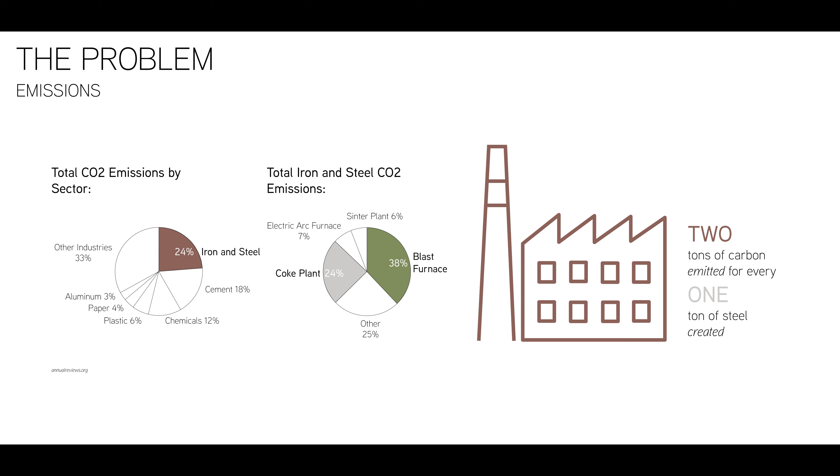One of these major industries is iron and steel. Responsible for 24% of total industry emissions, the production of iron and steel releases more than 3 billion metric tons of carbon dioxide each year, making it the industrial material with the biggest climate impact. This breaks down to about 2 tons of carbon emitted for every 1 ton of steel created. This is largely due to the use of coke plants and blast furnaces in the production process.

We cannot, however, simply stop producing these materials. It is forecasted that by 2050, steel demand will almost double from 1,600 million metric tons to 2,800 million metric tons. This is largely due to how much steel is needed to construct our future infrastructure. Renewable energy, which includes solar, wind, geothermal, and others, is at the center of the transition to a less carbon-intensive society, which also puts steel at the center of the conversation. Steel is required by each of these markets, and without steel, none of the renewable energy sources would be possible.

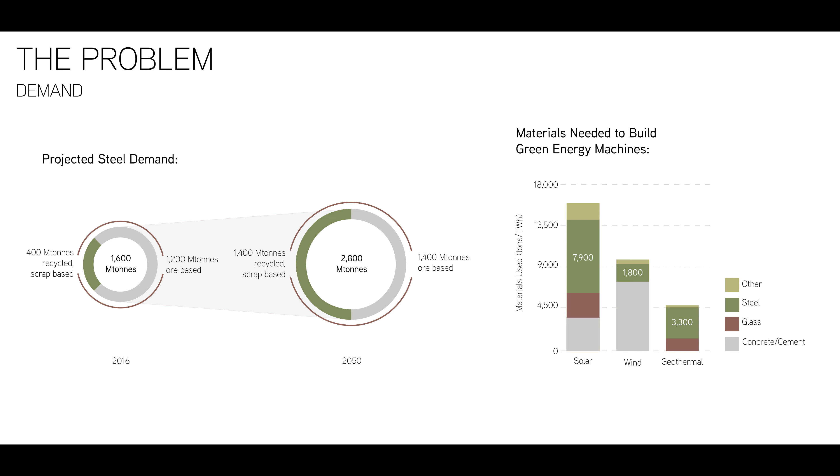We look to global leaders in the steel industry to see how they are leading the charge to carbon neutrality. In the US, BP is financing the world's first solar-powered steel mill. Companies in Germany, France, and Sweden are all gradually converting their steel production to direct reduction with climate-neutral hydrogen. In Austria, Mitsubishi Heavy Industries will soon complete the world's largest steel plant capable of attaining net zero carbon dioxide emissions through hydrogen. It is clear that steel players across the globe, and especially in Europe, are increasingly looking to green hydrogen for the future of their steel production.

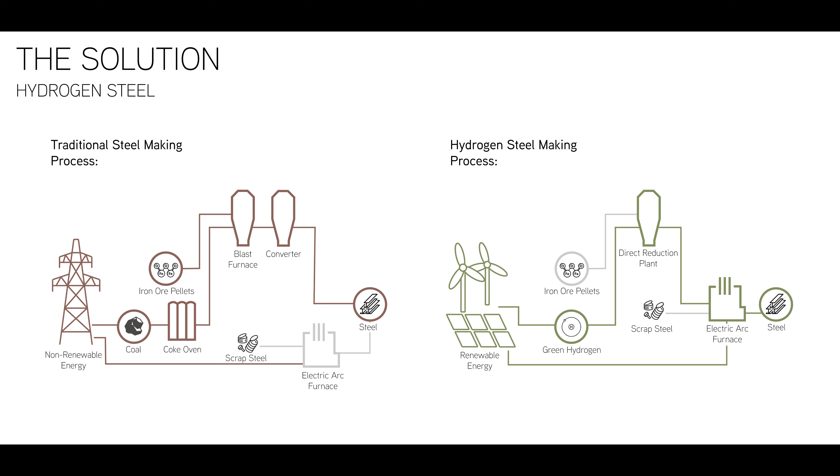In contrast to the traditional methods of steelmaking, which involve converting coal to coke in a process that releases mass amounts of carbon, hydrogen-based steelmaking neither requires a coke oven nor a blast furnace or converter. The raw materials, iron ore and hydrogen, go into the direct reduction furnace and come out as DRI, which is then made into molten steel through an electric furnace to create steel products, with the only byproduct being water vapor. When the hydrogen used in this process is derived from renewable or decarbonized sources, the steelmaking process can become completely emission-free, creating green steel.

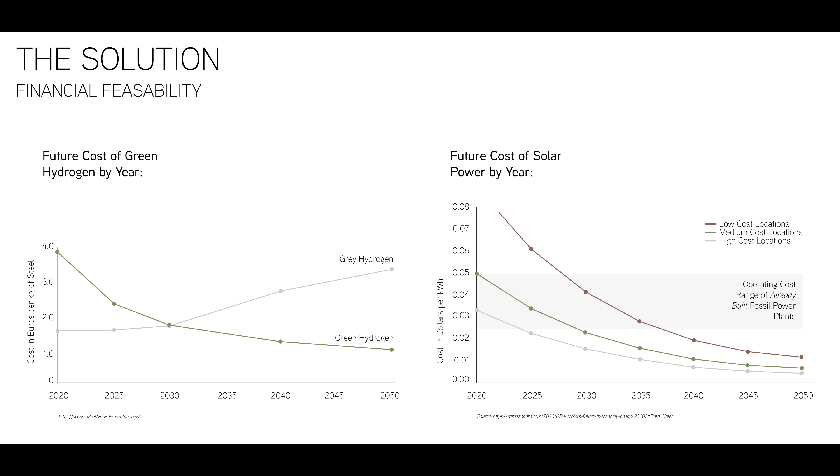In order to make hydrogen-based steelmaking a more attainable feat worldwide, the cost of production must be within or close to the cost range of steel made using coal. Experts agree that due to the decreasing prices of green hydrogen and renewable energy sources like solar, hydrogen steel will be cost competitive between 2030 and 2050.

As a case study for the Green Steel Initiative, Zug Island was chosen due to its intrinsic history with the industry of steelmaking. Located just south of Detroit, Michigan, the island was historically a marsh wetland peninsula, but became heavily industrialized in 1901 when iron making was brought to the island 120 years ago. Zug Island is located in and contributed to what is known as Michigan's most polluted zip code until it idled all operations in 2020, resulting in the loss of approximately 2,000 jobs to the adjacent community.

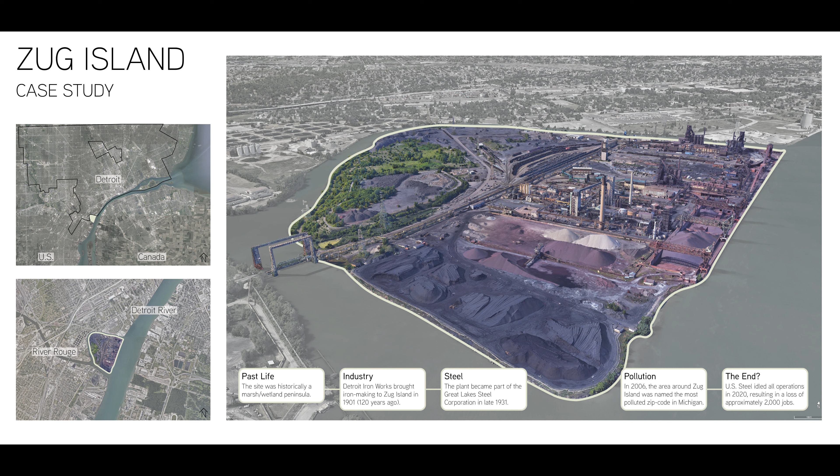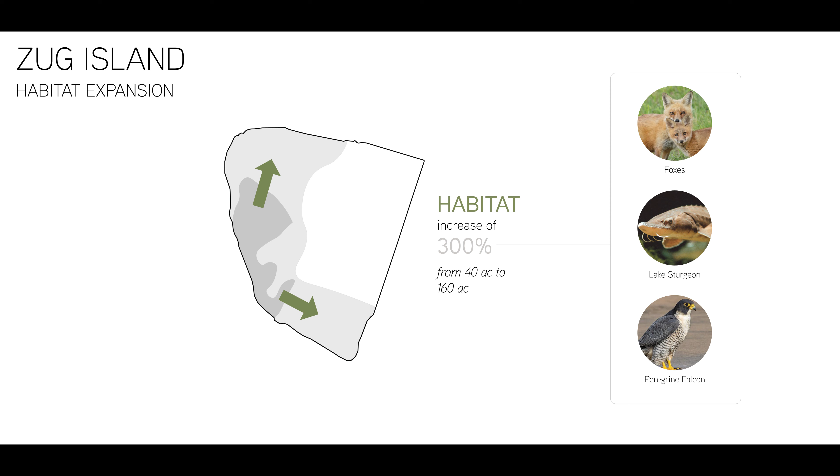Despite the pollution and blackened appearance of the island, there are still a number of species that call it home. These include various foxes, lake sturgeon, and falcons. Converting Zug Island to hydrogen-based steel production will allow for the removal of the coal piles that dominate most of the island, resulting in a 300% increase of habitat from 40 acres to 160. This increase in habitat will allow for more trees to be planted across the island, resulting in over 1,000 tons of carbon sequestered per year.

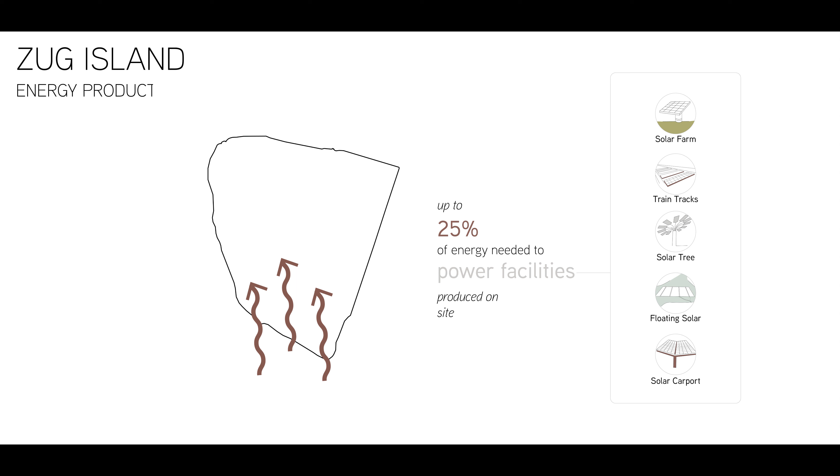Although most of the energy needed to power the steel plant will come from larger solar and wind energy systems across Michigan, the island has the capacity to produce up to 25% of the energy needed to power the facilities. This would be produced through the use of a solar farm, solar train tracks, solar trees, floating solar in parts of the surrounding river, and solar carports. Finally, although Zug Island will never support the amount of jobs it once did due to increased production efficiencies within the industry, the move to hydrogen-based steelmaking will provide around 300 permanent jobs and 500 temporary construction jobs for the surrounding community.

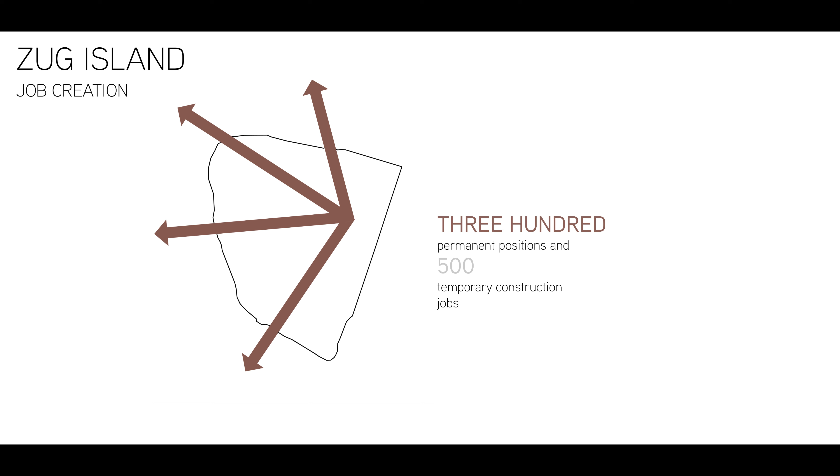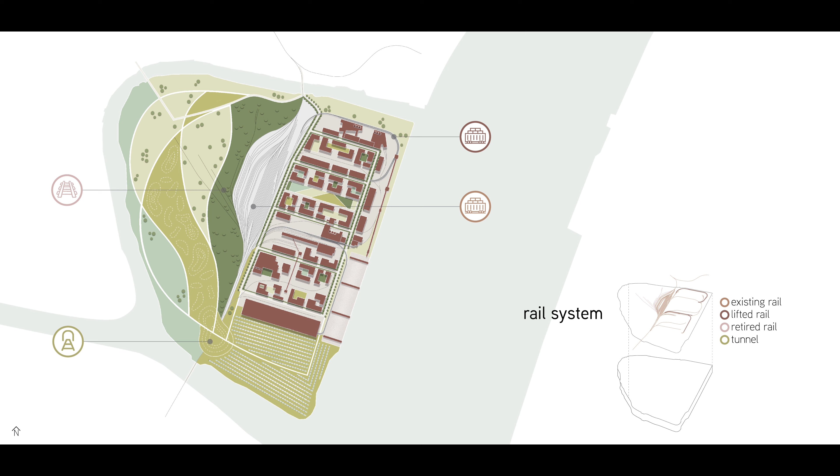Zug Island Redefined has retained most of the existing rail system, excluding a few superfluous lines closest to the expanded habitat. The rail system is used to bring materials onto the island as well as transport finished green steel products. A portion of the existing system to the south of the site will be placed in a tunnel under an earth mound in order to connect the nature trail and the two halves of the island. Of the buildings existing on site, the 3 blast furnaces, coke plant, conveyors, cranes, and cargo dock were all retained and will be converted to aid in the hydrogen-based steelmaking process. The new buildings on site include a materials warehouse to the south, in addition to multiple new facilities that can be used by new green industries.

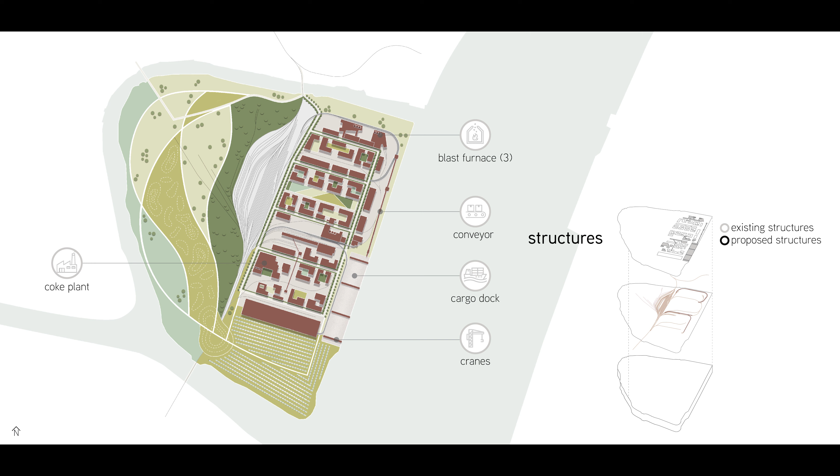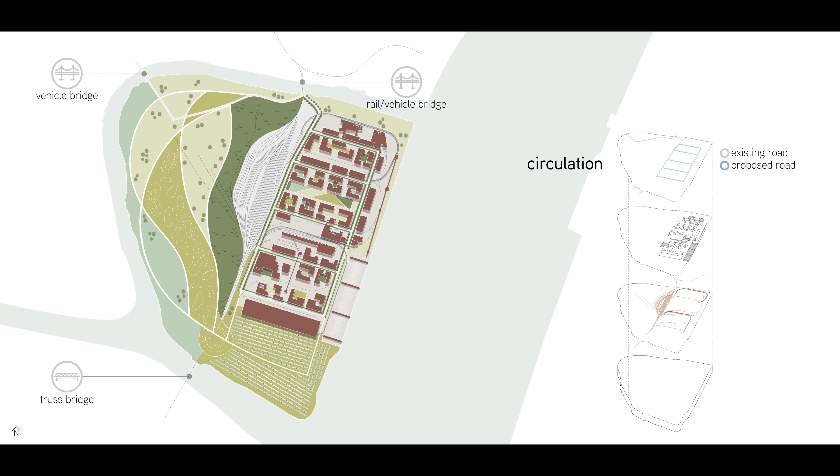The site circulation retains a northern portion of road in addition to 3 bridges that connect to the mainland. These include a truss bridge that is used solely by the train, in addition to 2 vehicle bridges to the north. The proposed roads through the industrial part of the island are more linear in order to increase efficiencies in transportation. The proposed trails are utilized to connect the more natural aspects of the site with the solar field and industry buildings in order to create one integrated system. The proposed trail also moves through the site's multiple restored natural spaces, including forest, wet prairie, and wetland habitats. The most toxic soils on site will be placed in large piles and capped to aid in the detoxifying of the island. This will result in earth mounds.

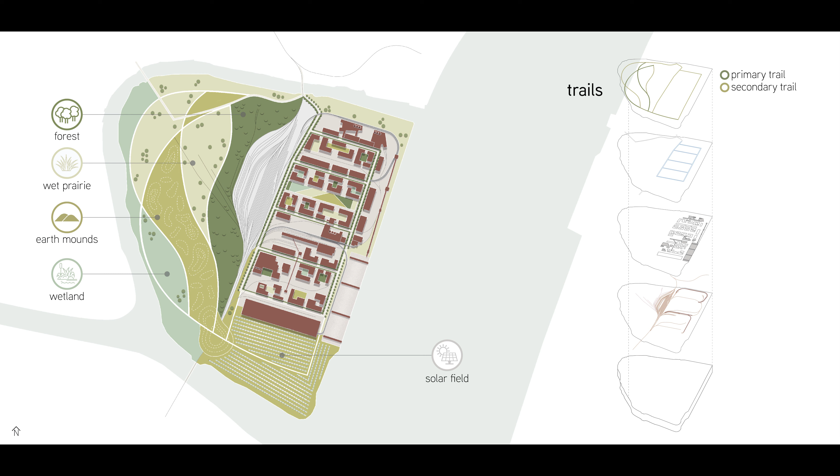Incorporating hydrogen into the process of steelmaking is necessary to wide-scale decarbonization and worldwide emissions reduction. As hydrogen continues to become readily available, so will the opportunities to make industries and places like Zug Island green. Through the introduction of hydrogen steel, Zug Island is able to redefine the fields of energy, industry, and restoration as we look towards a carbon-neutral future.